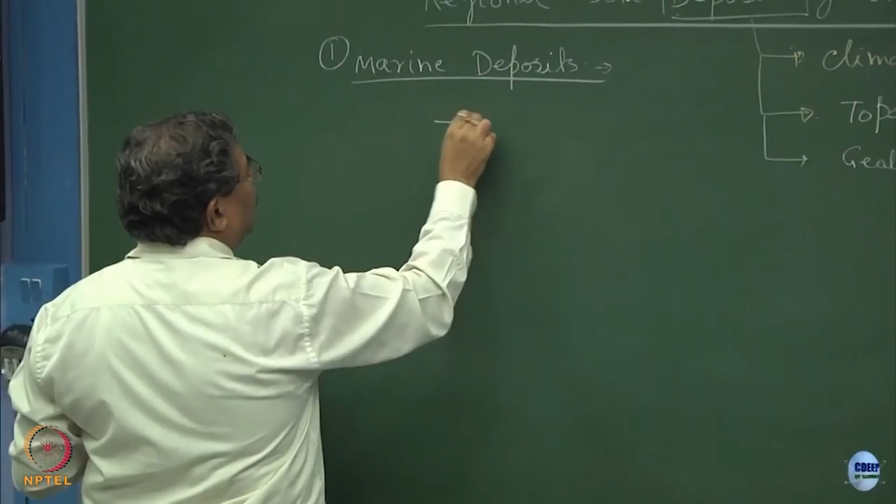First category is of marine deposits, very soft soils, very high moisture content. A substantial portion of this type of soil would be organic matter.

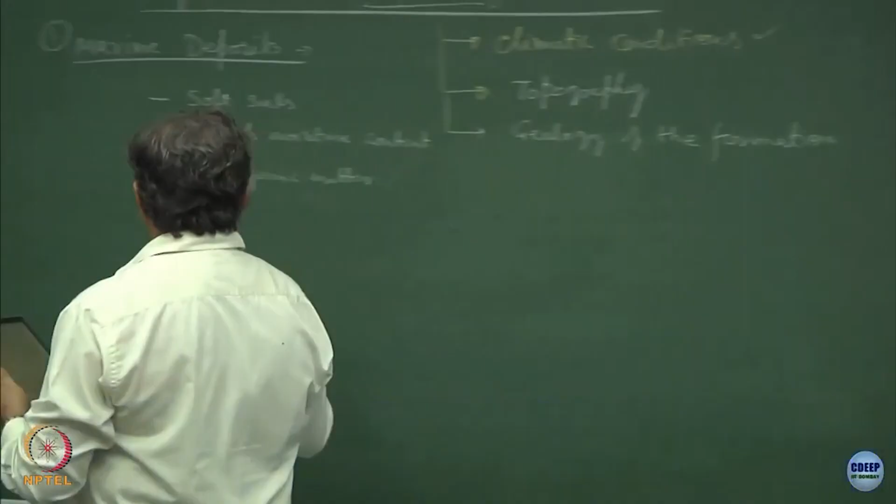Now, when the soils are soft and have high moisture content, by virtue of these two things they will become very compressible. Now, when they become compressible, what will happen? Is it a boon or is it a bane?

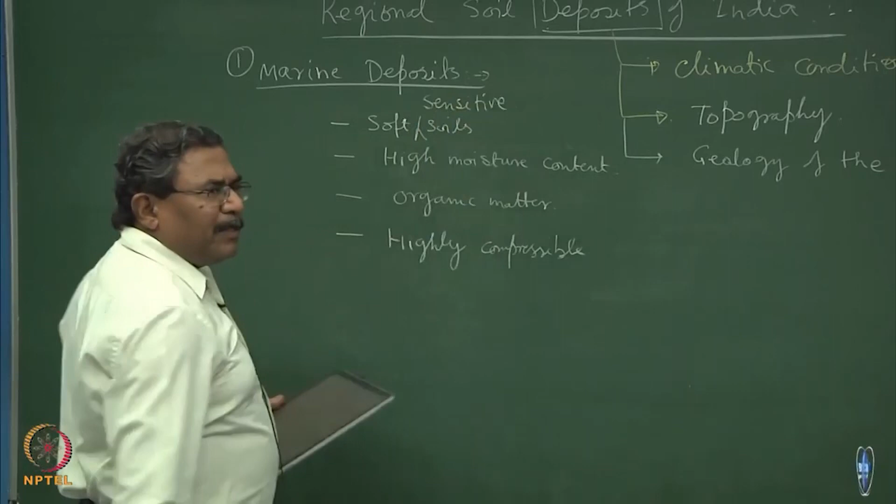Marine deposits, by virtue of their nature of being close to marine systems, have very soft, sensitive soils. When we say human beings are very sensitive, what is the meaning of this? You get influenced by everything very quickly. Somebody says he is not good, now you will be down for at least six hours. Like that only, these soils are very intelligent materials. They are very soft but very sensitive also. The moment you touch them they get disturbed.

It's very difficult to take out the sample from the ground, bring it to the laboratory, test it, and get the parameters which can be utilized for design purposes. So these are very soft, sensitive soils with high moisture content. Why? Because they are in the water body all the time.

Organic matter is present, it is a bane for geotechnical engineers, but a boon for which industry? I am yet to see any agriculture farm sitting on marine clays, only oil farms can be there. Hydrocarbons. So organic matter, which becomes a bane for me, is a boon for the guys who are into the petroleum industry.

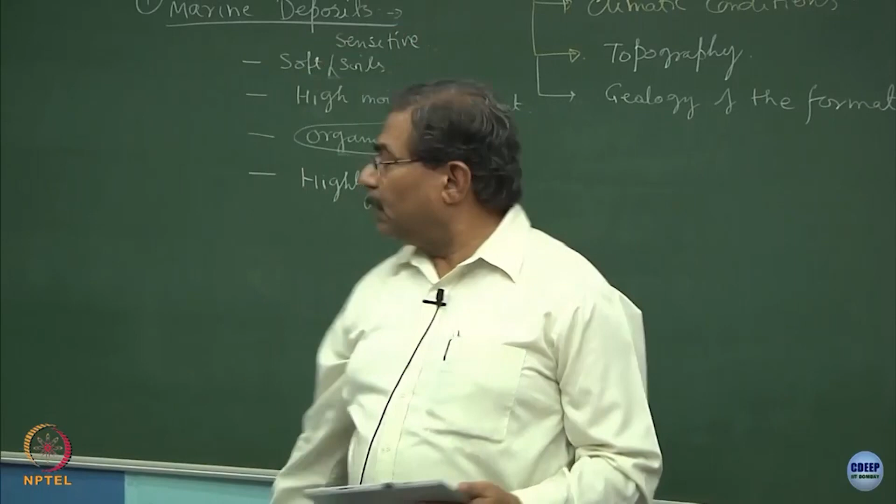Bombay High, there is only one Bombay High. Have you heard about anything else except for KG Basin now? In Assam you have some oil fields, in the western part of the country now you are talking about Aishwarya and all these Navaratnas which have come out very recently in the deserts. So wherever you have organic matter - by the way, calcium carbonate present in desert soils could also be organic in nature. It could be inorganic also, it could be organic also.

So this organic matter plays both ways. These deposits are known for good oil reservoirs - these are the petroleum reserves. But as far as laying the foundations, construction of infrastructure, creation of buildings is concerned, it's a very big problem. These are highly compressible, just like a sponge.

Another category, let us talk about the black cotton soils which somebody was discussing.

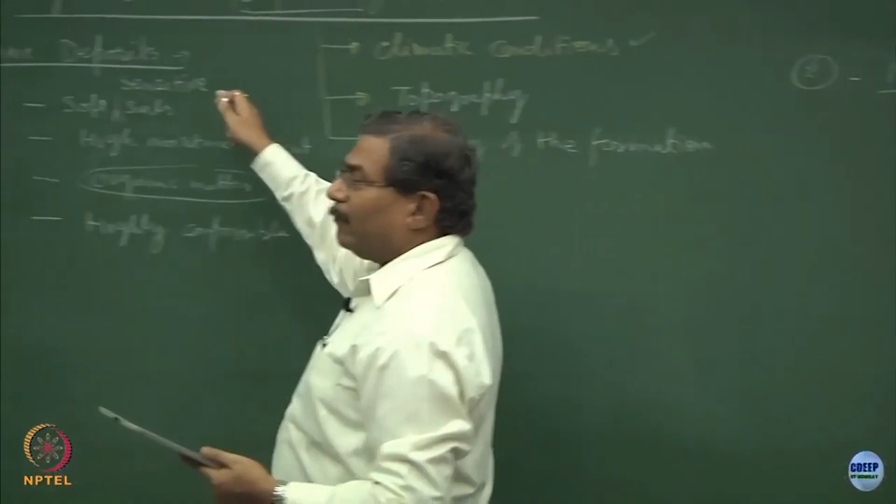But believe me, you are lucky that you are studying geomechanics in the coastal region. Sitting at the marine deposits, the saying is those who start their profession with marine deposits flourish much more. I hope you can understand why - because the challenges and the ways to learn the material and perfect it are much more as compared to any other part of the country.

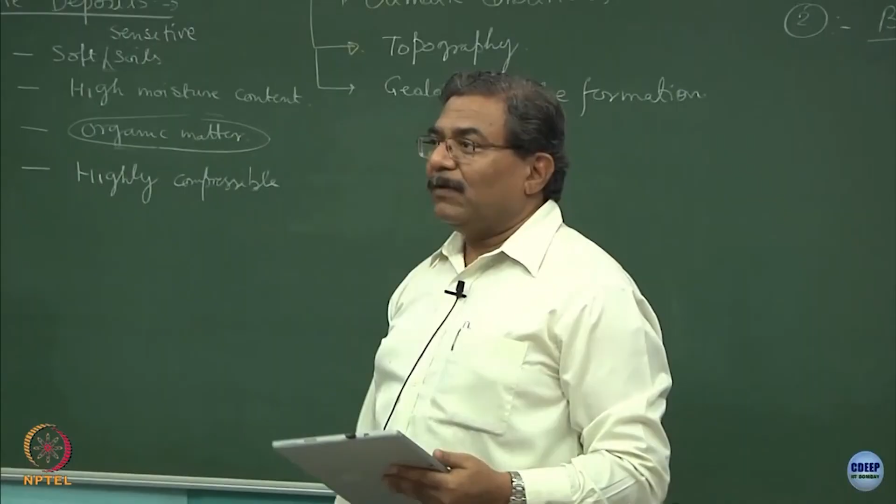So the guys who are sitting in the northern region or hardcore southern peninsula are unfortunate, they can't practice this much. When I say practicing, I hope you understand the meaning of the word practicing. What do lawyers do? They practice law. So this is the subject which is to be practiced.

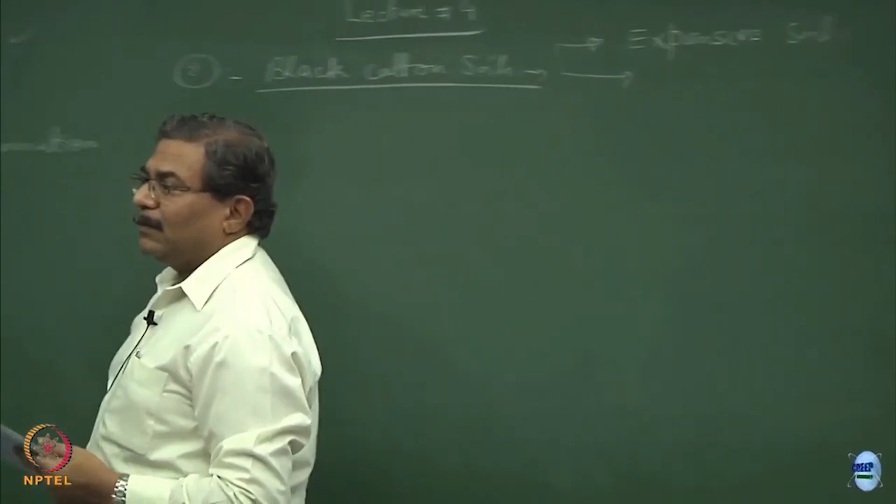So black cotton soil, by virtue of the minerals present in it, is an expansive soil. Mind the spelling of the word - it is not expensive. Most of the interviews where I sit, most of our graduates say it's expensive soil. It is not an expensive soil, it is an expansive soil. The meaning of the word expansive is...

Somebody is from Vidarbha - who is from Vidarbha? You, not really, but Indore - not Indore - say parts of Karnataka, Nagpur, yeah, but these are the deposits where you have black cotton soil. Nasik is a beautiful example.

So these are the places where you will have mostly black cotton soil, where you see cash crops being grown. So these soil deposits are very good as far as cash crops are concerned. What are the cash crops? Cotton.

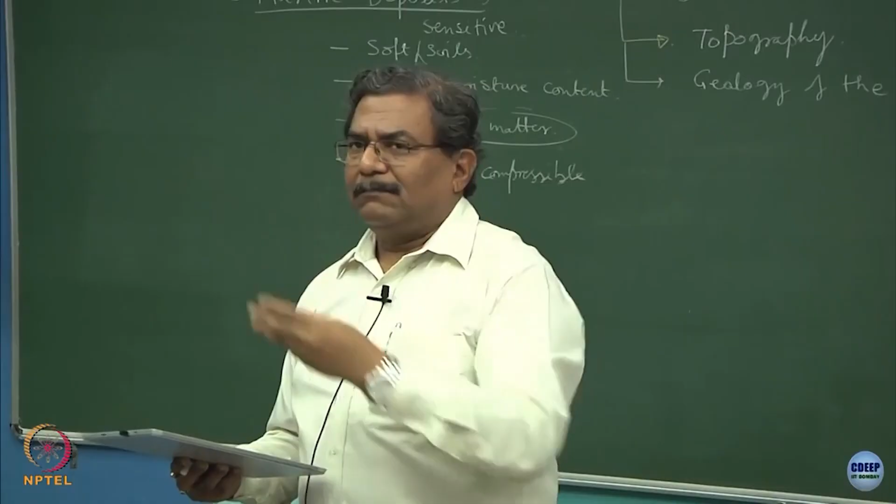Number two, yeah, you are right. Haldi - oh, I did not know that, okay, haldi. Third one, cash crop, yeah, main cash crop - sugar cane. Big sugar industries are there in the whole Maharashtra region.

So, because of the property of the black cotton soil, it retains a lot of moisture - not because of being organic and fibrous in nature. Who was talking about fiber? You were talking about the fiber. It's not being fibrous in nature, but by virtue of its minerals - and the minerals present in this material are known as montmorillonite.

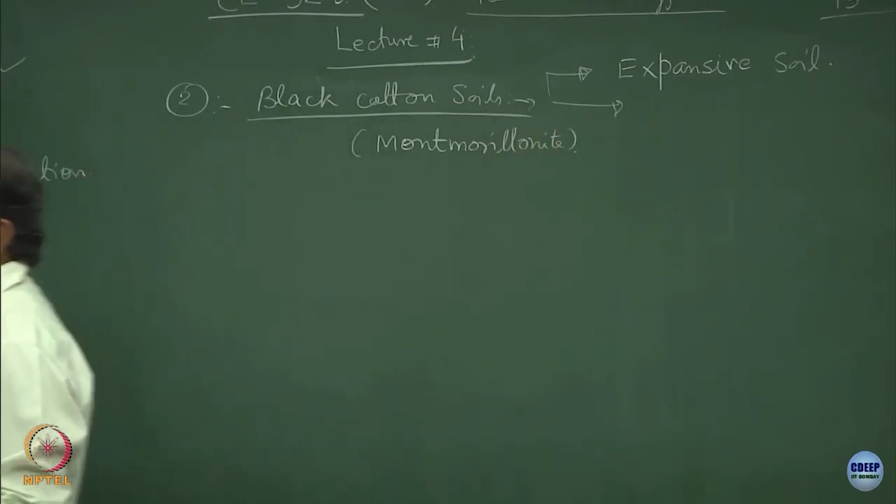Clear? This is a cousin brother of bentonite. Another cousin brother of these minerals is smectite. Where do you use smectite? In which industry? Sports. Clear? So, if you want to make pitches, you have to have smectite much more in proportion; it becomes a good recipe. So, black cotton soil will have mostly montmorillonite, which is a type of a bentonite,

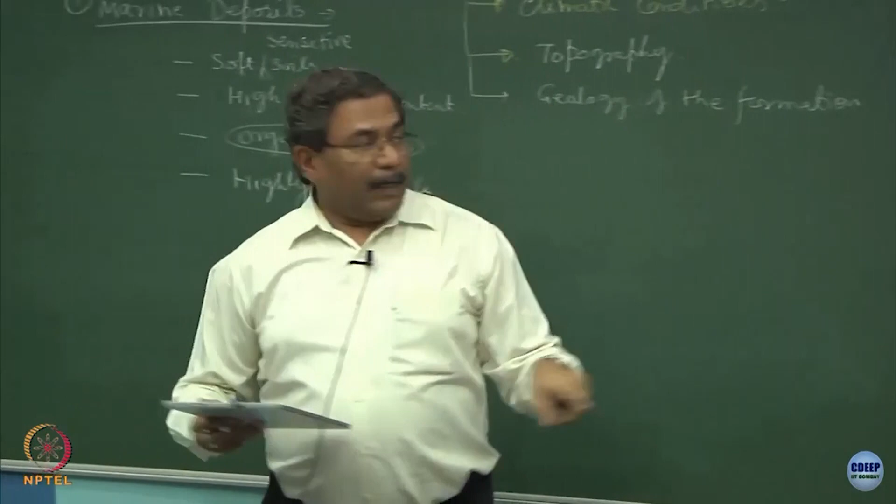but it is quite rich as far as the agricultural properties are concerned. Why? The soil's particles are very active chemically. Somebody was talking about it in the very first lecture: the sorption capacity of the particles is very high. Clear? So, the moment you add fertilizer, not even a fraction of fertilizer will go unutilized. Each particle of the fertilizer, or each drop of the fertilizer in the liquid form, will adhere to the particles because of their mineralogy. Clear?

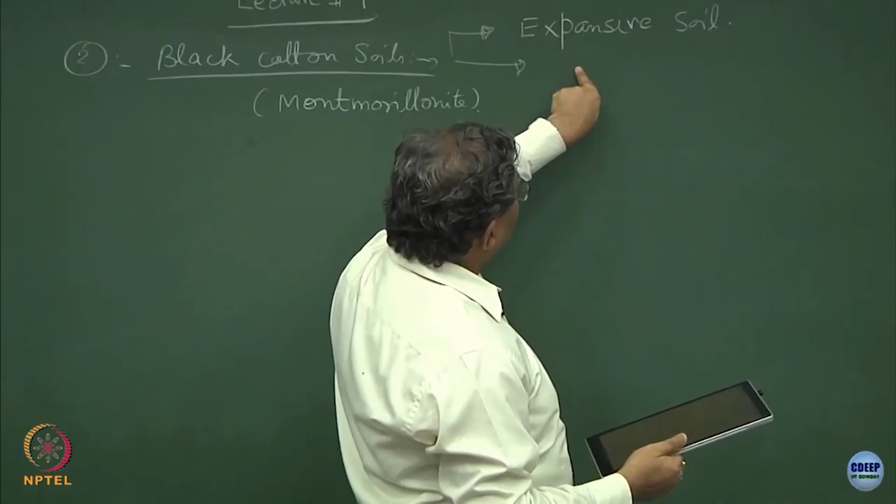And this also is a curse, a bane. Why? By virtue of all these things, they attract moisture a lot. So, the moment they come in contact with free water, if it is raining heavily and water gets logged, this mineral is water thirsty, hungry. What does it do? It can take as much moisture as possible. Clear? So, that is the problem, and when the dry spell comes, the dry season comes, this moisture gets lost.

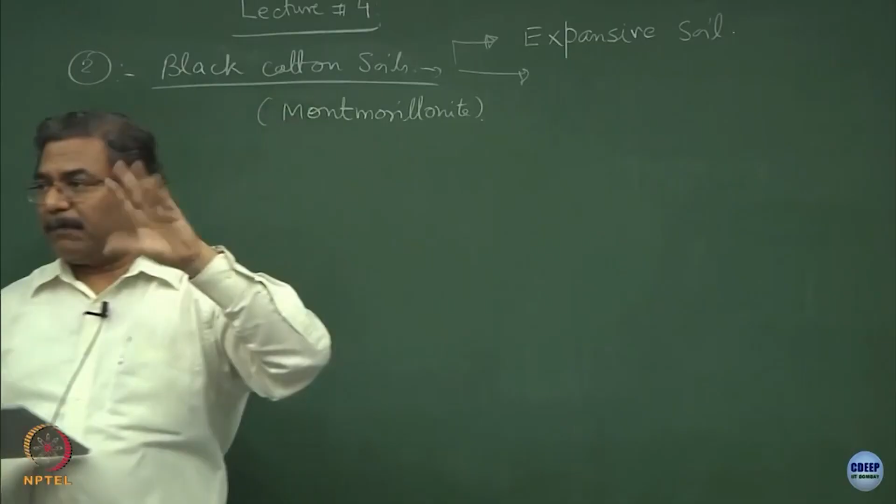So, it acts like a spring action, the soil shrinks. So, as far as the buildings are concerned, it is not a welcome material. In earlier days, the thumb rule was get rid of this material, excavate and replace the soil with better soil. Nowadays, the problem is the constructions have become so big, huge. How would you dig it? Where will you place it? How would you bring soils from another place? How will you compact it and so on? Lots of challenges are there.

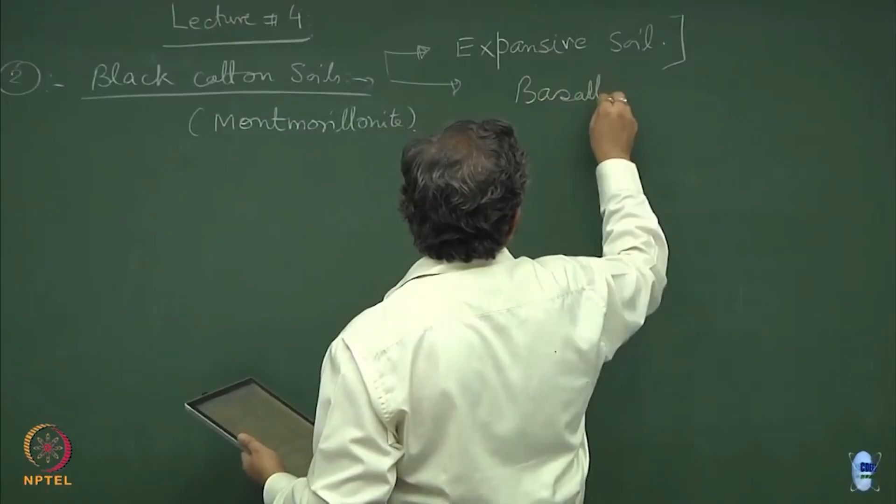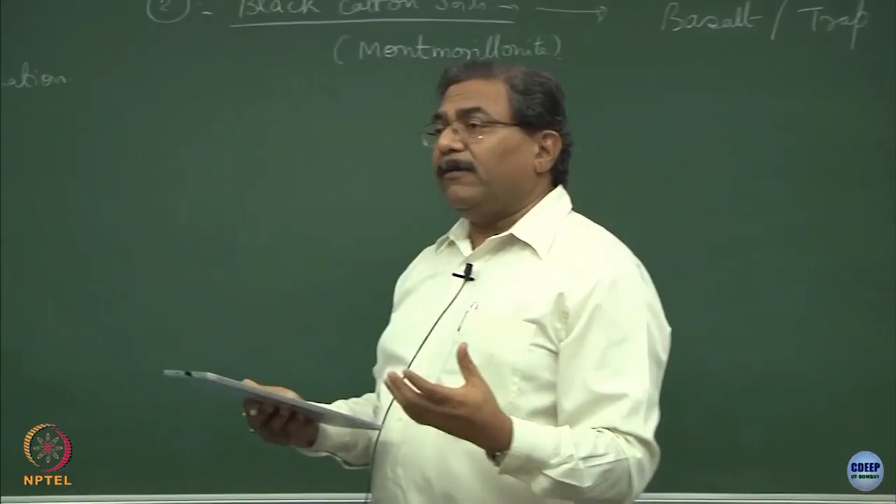Now, as far as the formation is concerned, these are formed mostly from basalt and trap. Trap is a type of rock, and that is why we call it the Deccan trap, Deccan Peninsula in India, and this is mostly basaltic in nature, alright. So, the type of rock which we have in the Bombay region is very dense, very hard basaltic material. So that is why it is very difficult to make infrastructure here; excavation is very difficult. So this process is known as swelling and shrinkage.

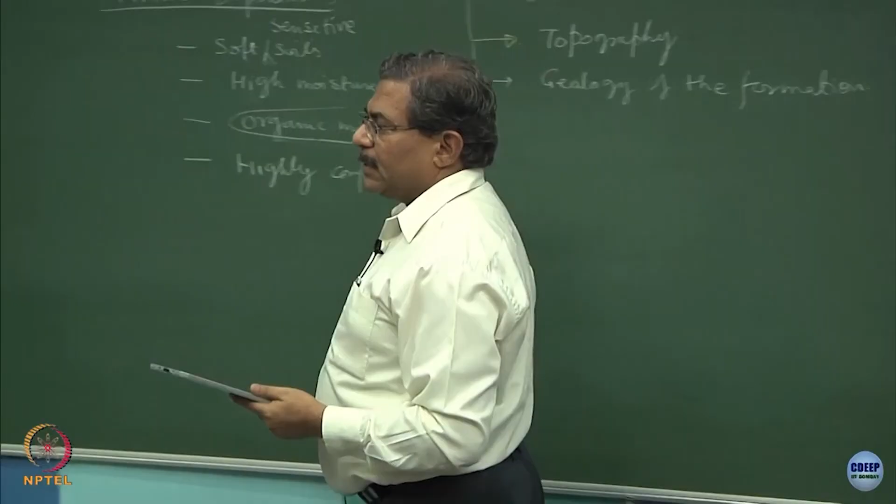This also hints at the property that this soil is very intelligent; it can sense the atmosphere very soon, is it not? So the moment the atmospheric conditions change, it starts behaving. Incidentally, in case you get a chance to work in the pharmaceutical industry, most of the geotechnical engineers govern the pharmaceutical industry, by the way. There was a time when I did a lot of consulting for Sandoz, and this is a very interesting process. Later on, I think I told you about my association with Reliance Life Sciences also, where we are talking about controlled porous media in the form of a controlled drug delivery system.

So I can play with the minerals, I can make them so porous like rasagullas, alright. So those who have diabetes, what do they do? They squeeze out all the sugar syrup, correct, and they just eat the porous part. People like us who are fat, they have consumed a lot of sugar and the bellies are out, clear. So this is the difference.

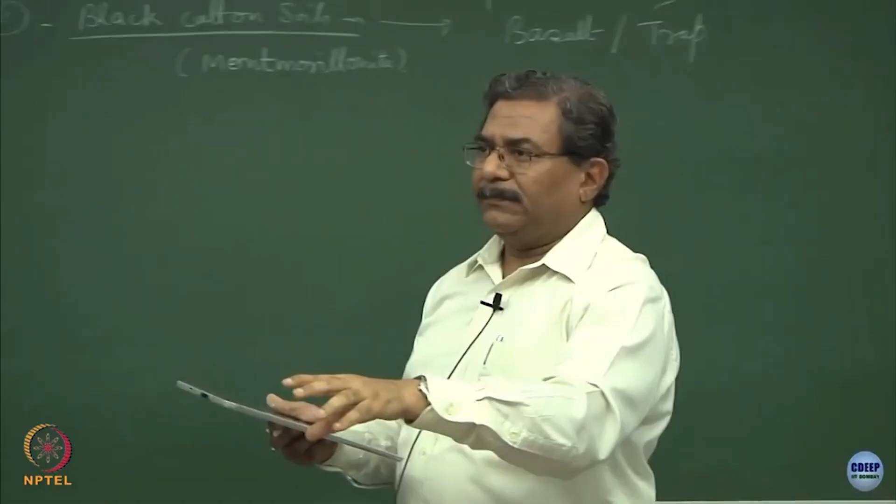So I can create a porous media where I can keep anything inside. I can keep a fertilizer, I can keep, let us say, chemicals, I can keep bacteria, whatever. So this is how you can play with the minerals. You can fill them with something, you can squeeze out, you can allow them to shrink and so on, and you can use them.

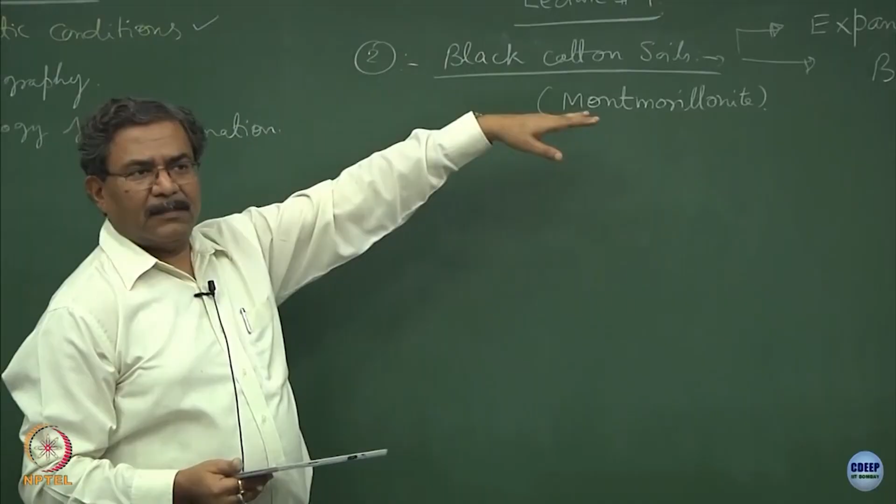Is there anything else which I thought of telling about the black cotton soil? No. So these are the good crop yielding soils. Most of the farmers in Nasik and Satara and all these areas, they grow a lot of sugar cane, then cotton, cashew nuts; these 3 are cash crops. 4th is now pomegranate. You were talking about haldi, I am not sure. And what else did somebody say? No, pomegranate is a big business in Maharashtra. Alright.

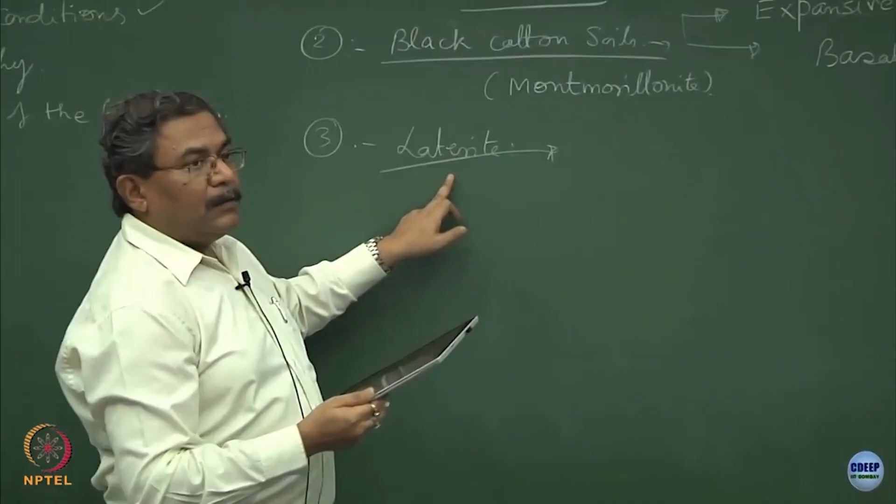Another one is laterite. How many of you are from Kerala here? So maybe the northern part and the middle portion of Kerala bordering Karnataka, I think you would have laterite. Incidentally, when the Konkan railway was being done, 1995-96, the big challenge was how to cut these types of lateritic rocks, and that was my first or second project. I was associated with the Konkan railways. Very hard rocks, but perforated. They would be having vesicles, and that is because of the leaching.

So is anybody here from Mangalore? Wow. Which part of Mangalore are you from? Near the airport area or maybe towards the refinery? What is the name of the place?

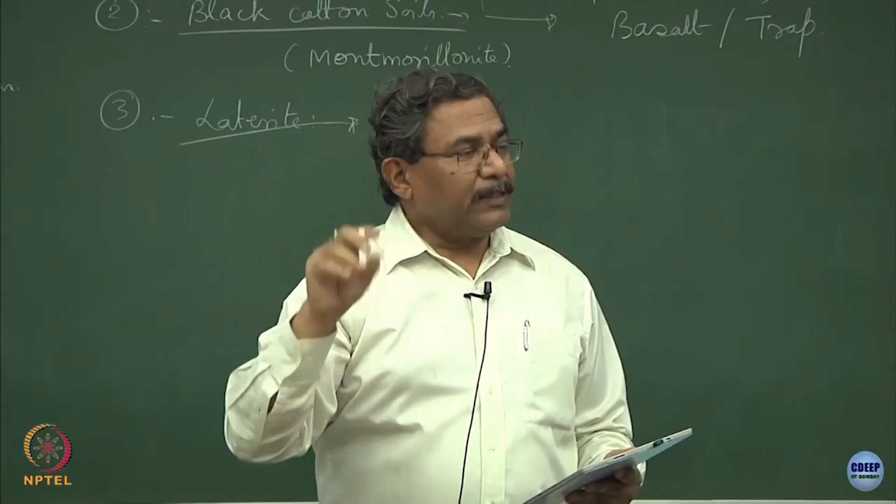Kodikal. So somewhere close to NIT Surathkal? Yeah, so that is mostly lateritic belt, alright. Red color soil, you will be having impregnation of yellow and white inclusions. These are magnesium oxide, iron oxide and so on. The big problem is, like human body, all these minerals keep on leaching out.

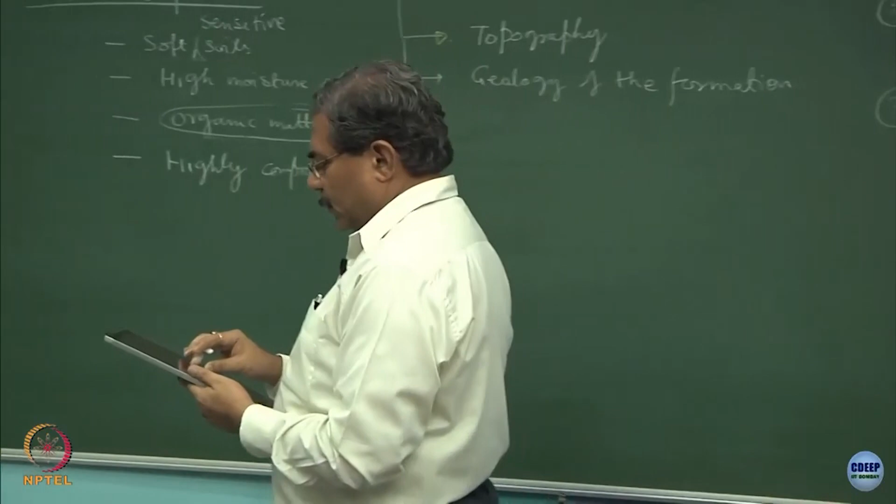In local language they call them as shady soils. Have you heard about this? SHEDI, shady soils. So a lot of people have done research on this. So all these salts keep on leaching out because of excess rains and the system becomes vulnerable, clear. So these are formed by decomposition of the rocks.

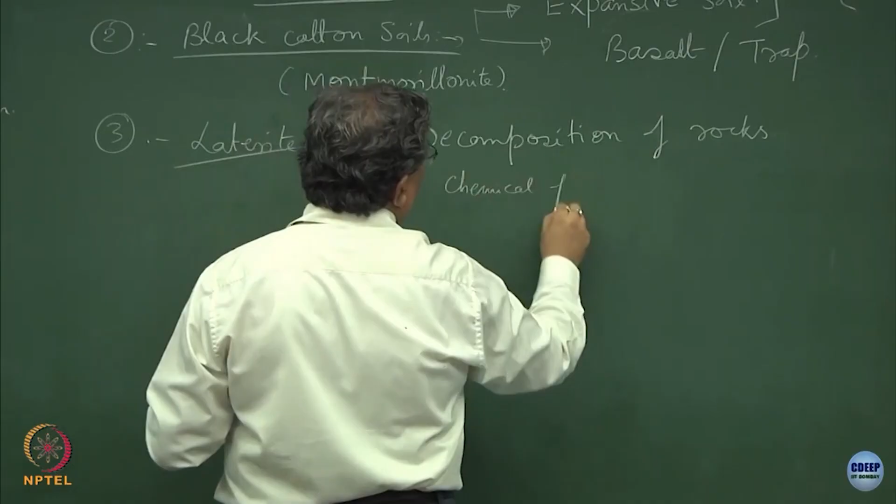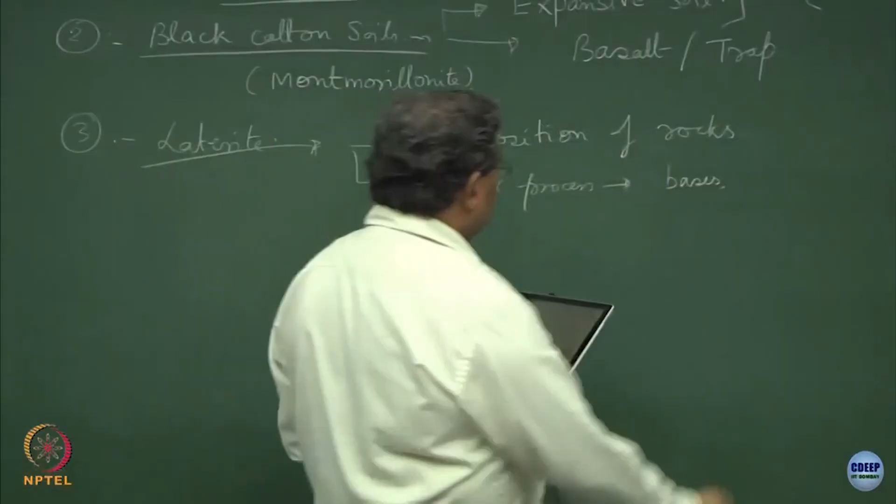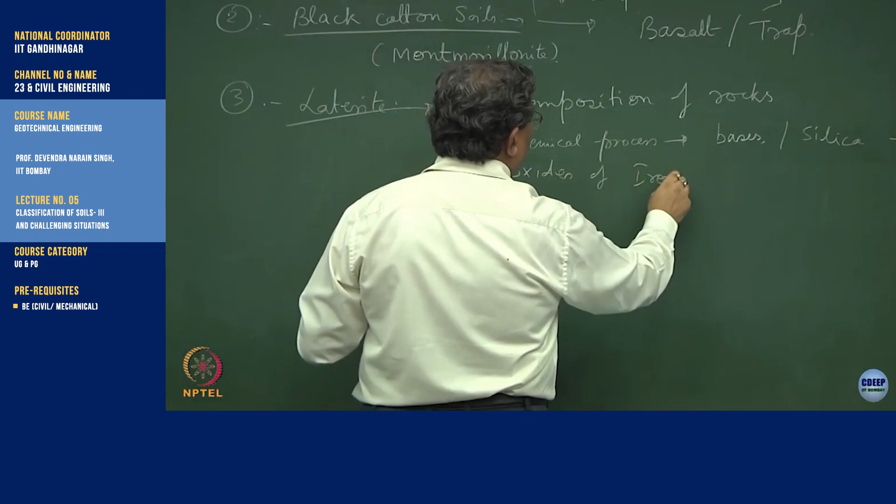It is an interesting chemical process which goes on. By this what happens is that bases which are present in the system, all sorts of bases, hydroxides and silica, are getting removed. And these are mostly oxides of iron and aluminum. In layman's language we call them as red soil. In part of northeast also you will be getting the lateritic material. So these are the lateritic formations.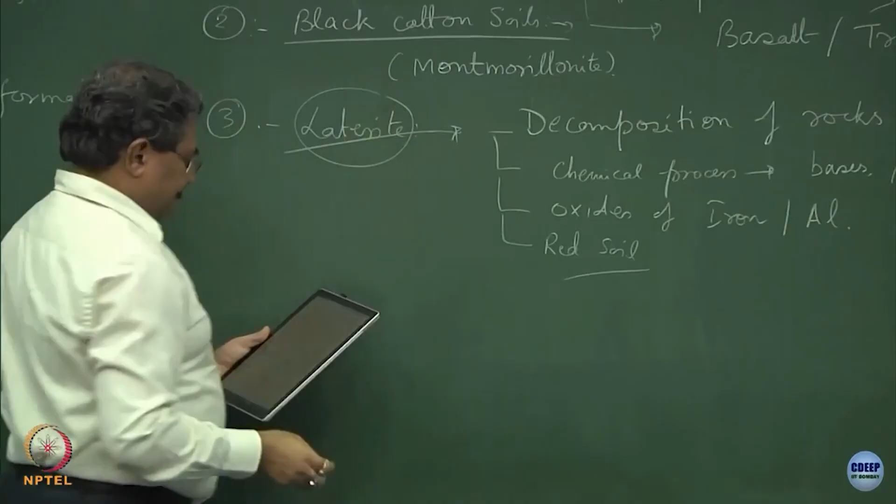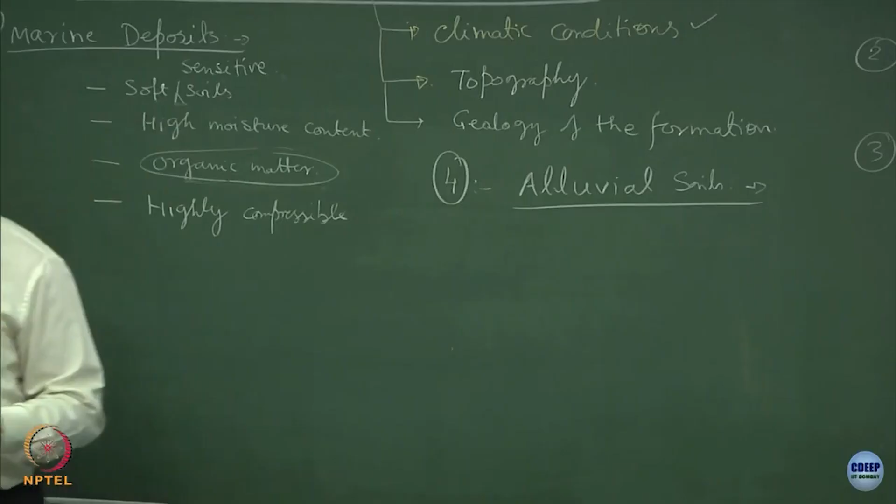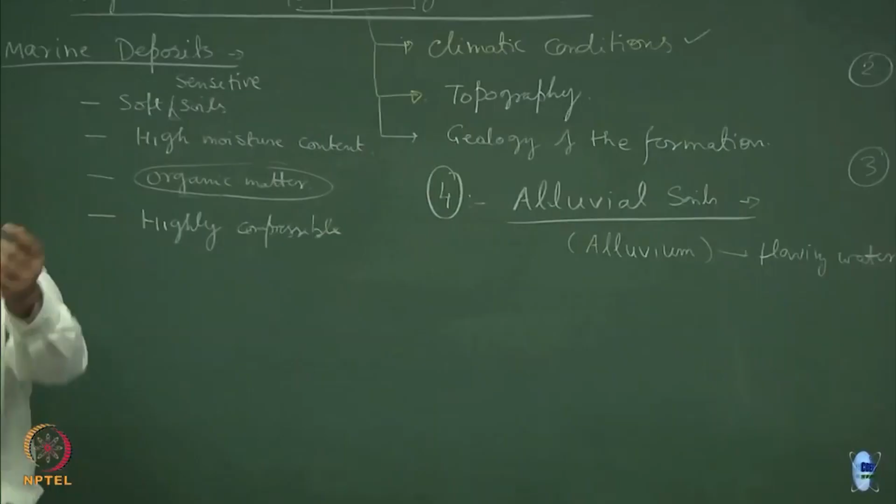Then comes the alluvium or alluvial soils. A typical alluvium is river borne sediments getting deposited somewhere. Now this is what is known as alluvium, alright, a deposit of sand, mud etc. formed by flowing water. So these are the layers of sand, silts, clays, and this is a typical alluvium.

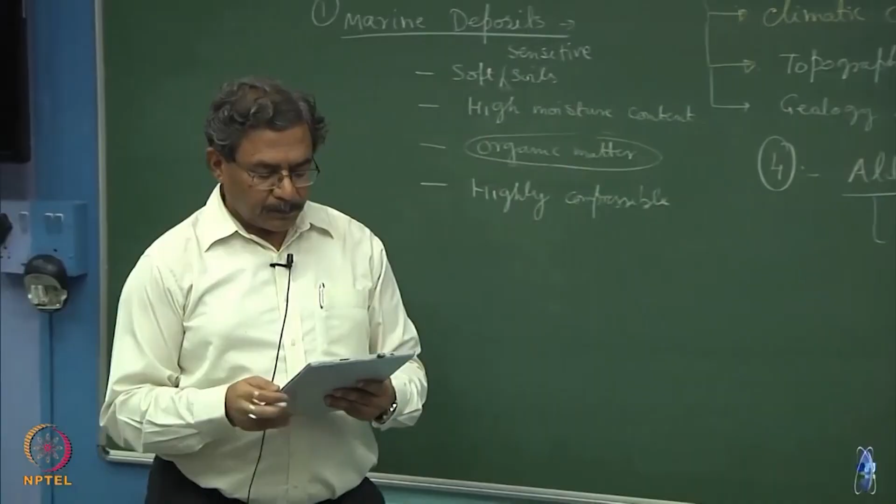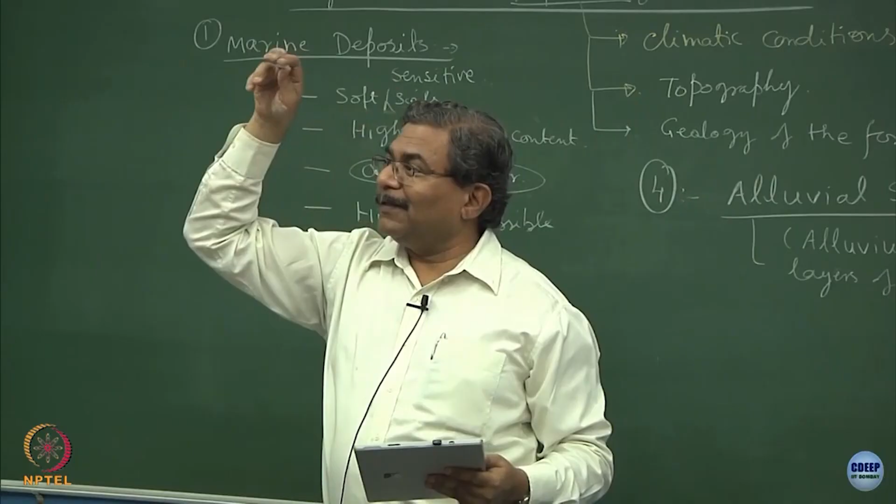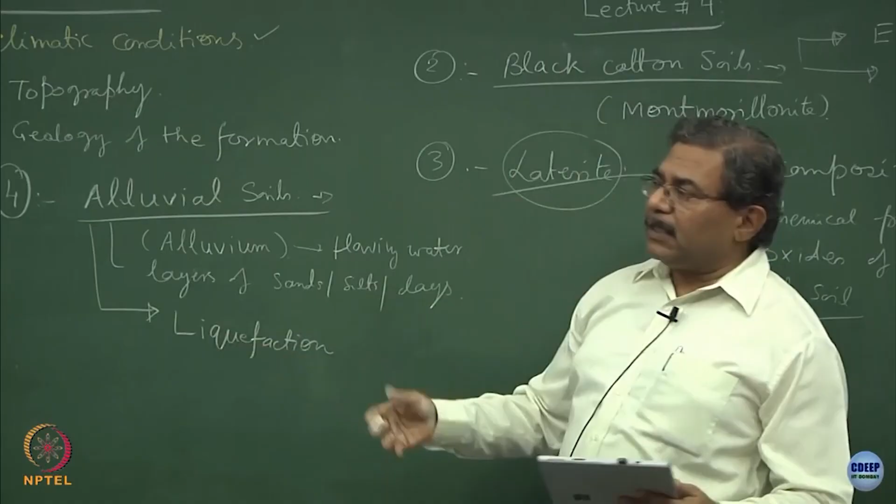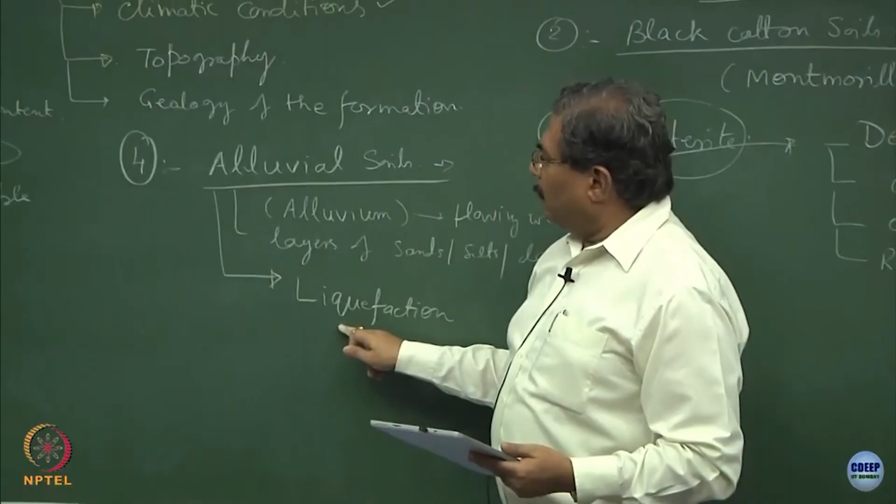These type of soils are, who was from Gorakhpur? Yes, these are prone to liquefaction. Is this okay? Can you read this? So if earthquake comes, it strikes this strata, the soil mass starts behaving like liquid. LIQUE, liquefaction. It just behaves like a liquid, and we will study this state of the material, how it gets induced because of the earthquake triggering. So the more motions which occur in the ground, in the form of the shear waves, liquefaction might occur. Fine silty sandy material is very prone to liquefaction.

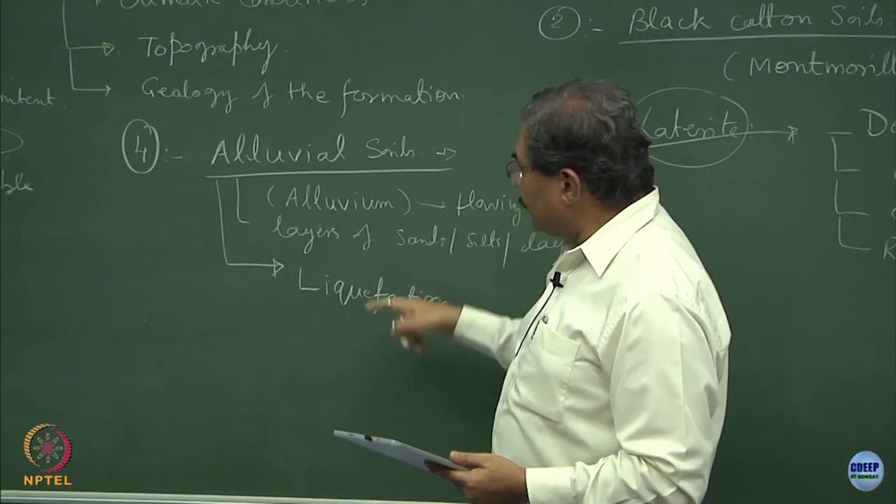I am sure you must be aware that lot of money is now invested in the eastern part of Bihar, and lot of big factories are coming over there now, particularly DLW is spending a lot of money, Siemens is doing a lot of work there, a lot of land reclamation is being done there and so on. This is a villain. If you can take care of this, you can do very good infrastructure. We will discuss why liquefaction takes place. Now liquefaction is loss of strength of the soil mass due to earthquake.

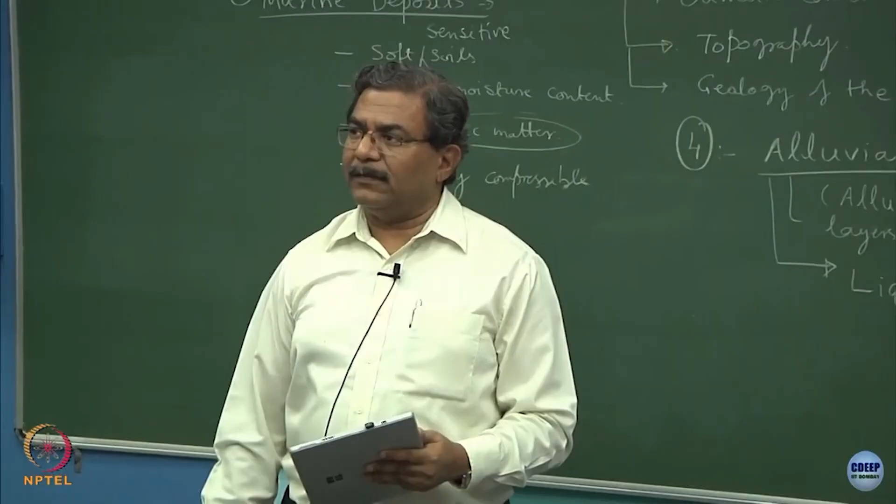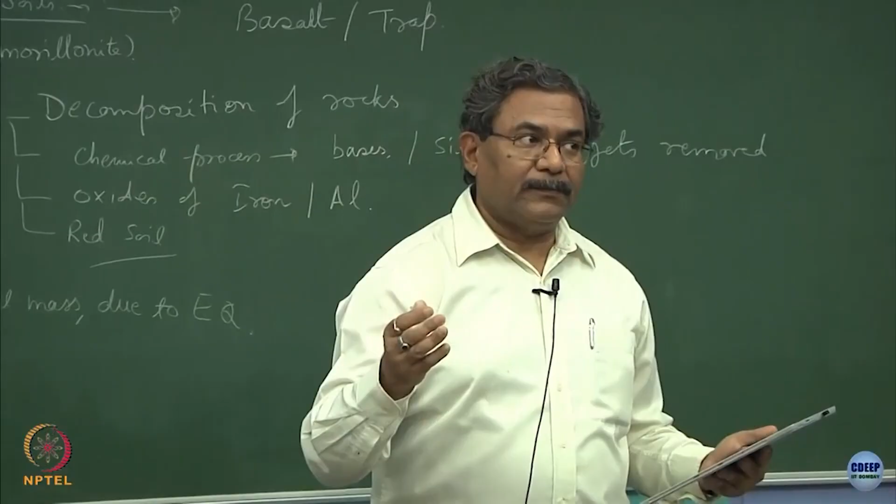Earthquake is a natural phenomena, it could be man made also. Yes or no? How? Koyna Dam is a good example of man made tremors, is it not? Tehri is a beautiful example of man made tremors. I might be laying a foundation of a moving, let us say vehicle or a forging unit where the hammer gets dropped from a height. Under all those circumstances there is an impact, and impact is causing the loss of strength of the soil because of any vibration, movement, shear waves travelling through the system. Is this okay?

Another category is desert soil. We have discussed a lot about it, and I hope you understand the issues. It is very difficult to stabilize these type of soils, either these are aeolian or loess, which we have discussed today. I am sure those of you who are from Rajasthan area must have realized that after independence it took several tens of years to create a railway line over there.

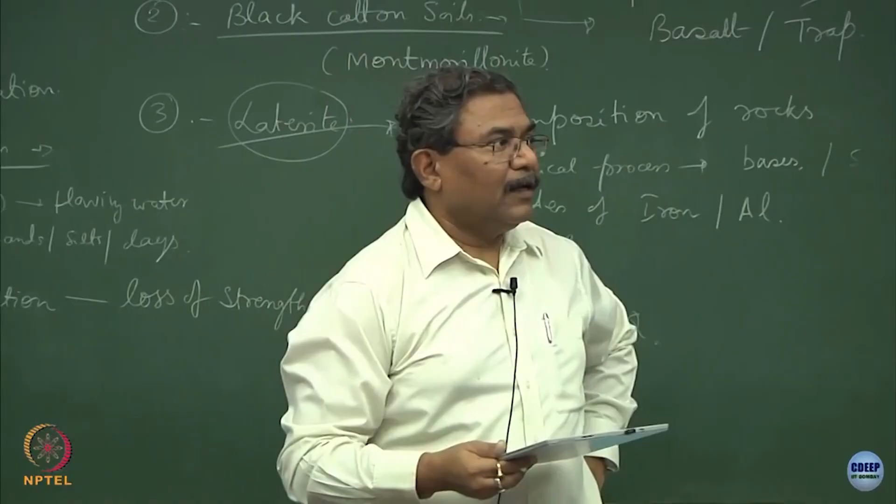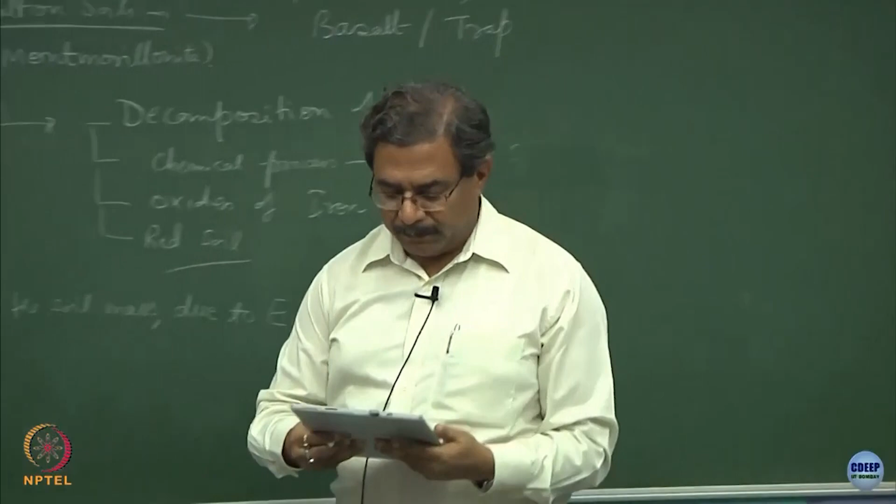So, we have discussed this. Now, I was talking about the infrastructure over there. The biggest problem is, as I gave an example about the Indo-Pak border, you cannot create even railway tracks. What happens? The soil gets eroded, is it not, because of the wind. So, desert soils, the biggest problem is how to stabilize them. Indian Army is doing a lot of good work there.

Incidentally, if deserts are not there, where would we have tested our nuclear weapons? Imagine. So, this is a boon. You agree? Where was Pokhran done? Very close to Jaisalmer, 30-40 kilometers away from Jaisalmer. So, if you are going towards Jaisalmer, you will be passing by the area which is cordoned off completely by the Indian Army. They do not let you go over there.

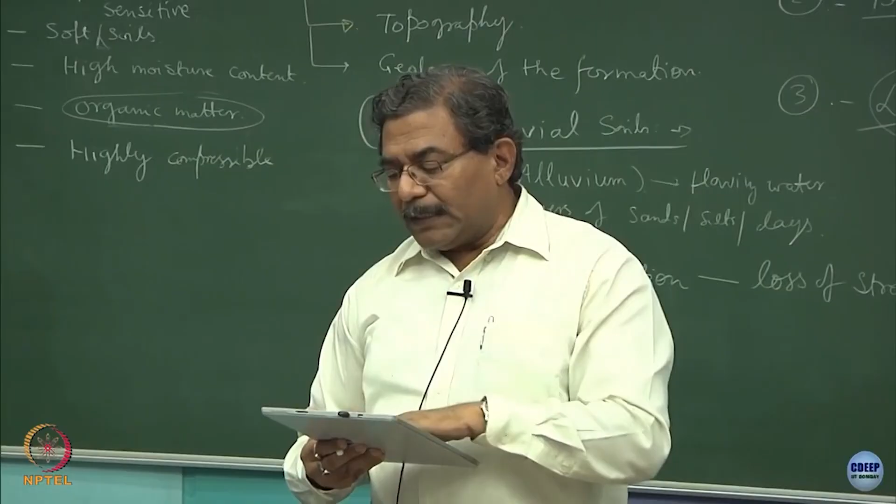So, if you get a chance to work with atomic energy, AERB or BARC or these types of organizations, you will realize how this detonation of the weapons is done in sands and why. So, you might get an answer to this question as the subject grows slowly, fine. There must be some mechanisms.

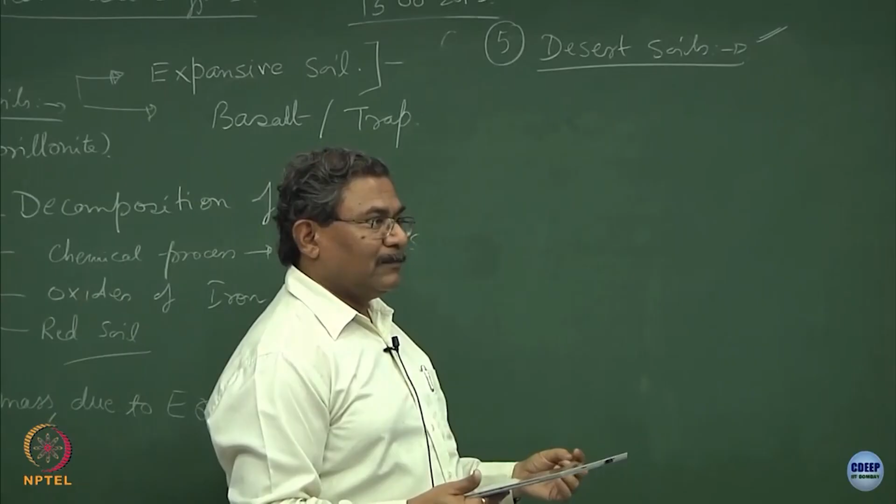So, I was talking about the shocks, earthquake, then I was talking about the shear waves, then about how the migration of the shear waves occurs, and then if I have to test the weapons which are nuclear, these are the right places, or the sea. Where would you like to do it out of the two places? Testing of nuclear weapons, if not a given country. Alright.

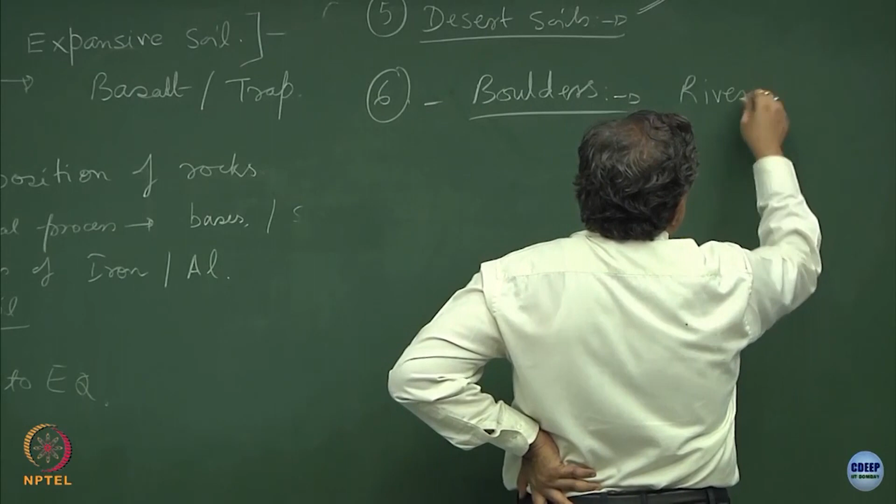Then come the boulders. I think we discussed this when we were talking about colluvium deposits, if you remember. So, on the steep slopes many times the boulders, clay matrix, fall down, get deposited, and then it becomes very difficult to create infrastructure over there. These are the typical deposits of the country. Mostly the boulders are because of the rivers which are flowing through hilly terrains.

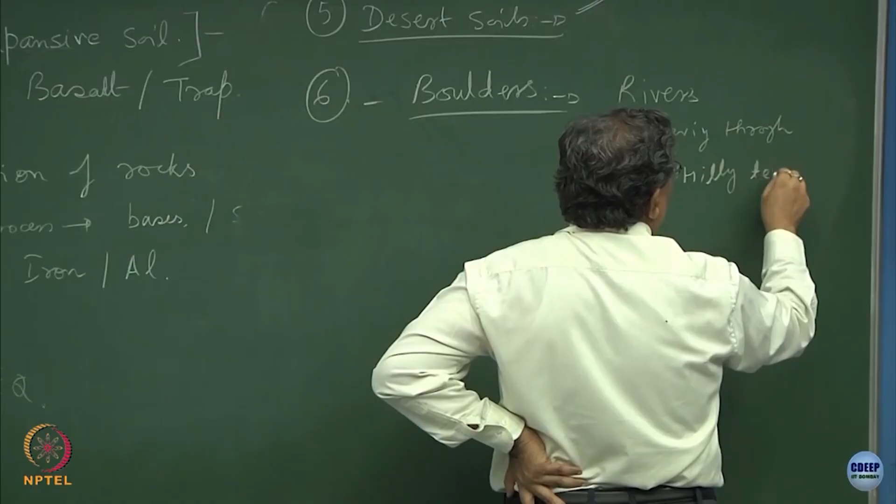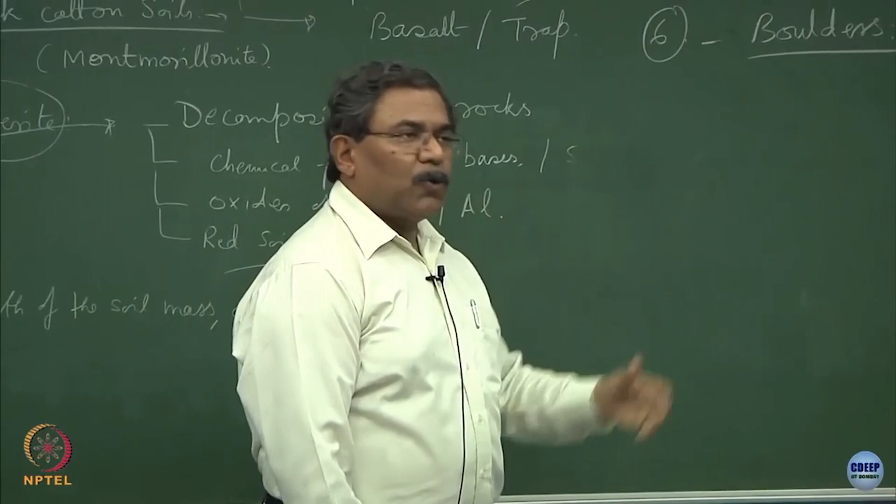Try to come out with the challenges associated with these deposits as far as engineering and infrastructure development is concerned. Though I have been telling you all sorts of problems, it is a good idea to go through this in literature form and read it, and in case you feel that you want to give back to the society from where you have come after a few years, this is going to be a very good homework. This homework is not time bound, this is for your entire life.

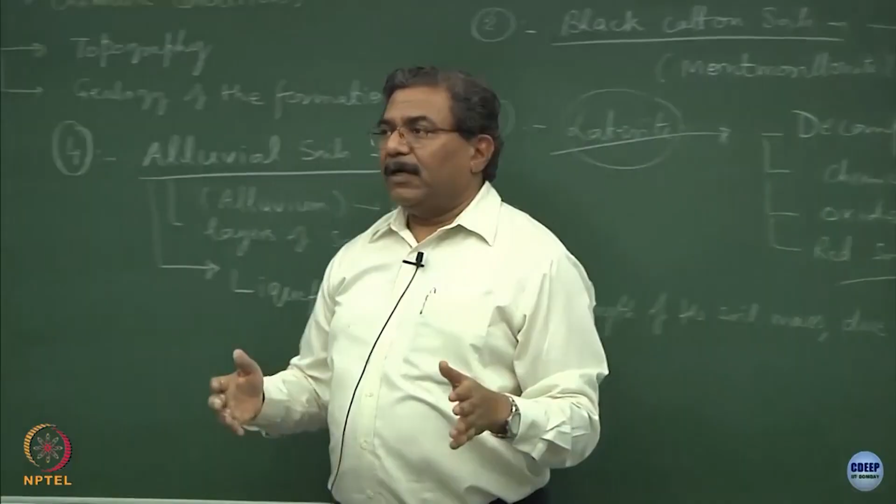Know your region properly, try to solve the problems of the region, and for that you have to study all this. So, how to do engineering, how to do technology demonstration in most of these deposits which are so difficult to manage, where people are unable to give a solution. This is what you should learn.

So, let me take you through some of the most challenging tasks which geotechnical engineers face in their career, and people describe them as problematic soils. And let me tell you one thing, this is the old concept. When I was a student, this is how we were introduced to the topic problematic soil, but in due course of time I realized that there is nothing known as problematic soils. These are challenging situations, and if there were no challenging situations, the profession would not have been so prosperous. You understand? So, this is where I write that because of the problematic soils, our profession flourishes.

I do not know whether you know or not, I am the consultant to Navi Mumbai International Airport. The whole project was my brainchild, and I convinced the government that this is how it should be done in the least time and with the least money. Ideas just come when you teach in the classroom and somebody asks you a question. Reclamation is one of the examples of how this Navi Mumbai International Airport has been done.

So, before I stepped onto the ground, the site was problematic because it was a part of the creek and active sea. It is the Panvel creek, I do not know whether you are aware or not. A creek is a place where most of the time water remains stagnant. It might be flowing also. So, Panvel creek, if you see on Google Maps, adjacent to that is the 1300 acres, which is 3 times the IIT Bombay campus, and this is what your new airport is going to be. Just for instance, I am giving this example.

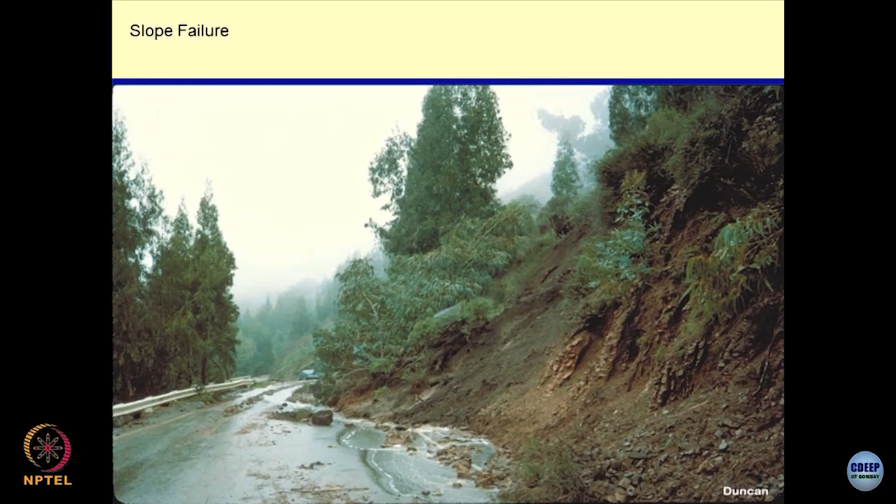It is another interesting problem: pipelines are the arteries and veins of the country. Why? Like your body, what do veins and arteries do? They flow blood. These are the pipelines which are flowing water. You must have seen water comes to Bombay city from Nasik when you drive through the Nasik highway. We are not water sufficient, by the way. We get water from different dams in Nasik. They were done by the Britishers. Or oil, crude oil, again the economy.

Now, if these pipelines are located in regions like this, where the ground is not stable, what is going to happen? It will result in losses. Rather than conveying the fluid, there is a lot of spillage, the pipelines get distorted, they might get broken and so on. The cause over here is, if you look at this, the foundation has got completely washed out. So, next time when you are travelling from Thane towards Nasik, remain awake and keep looking on the left hand side at the entire pipeline system and see what type of foundation they have provided.

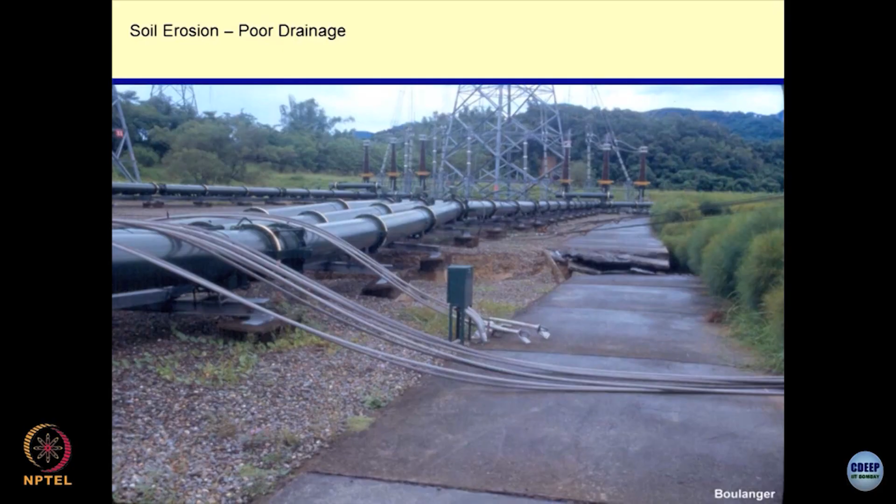One of the interesting cases which I am dealing with right now is for an MNC where the tolerance limit of the turbines, I think I gave you an example, is half a mm. So, when you design turbines, the tolerance is 0.5 mm. Now, ultimately the turbines are going to sit on a foundation which is located on the ground. Imagine if this type of situation happens, what will happen to the turbines, how would you run them?

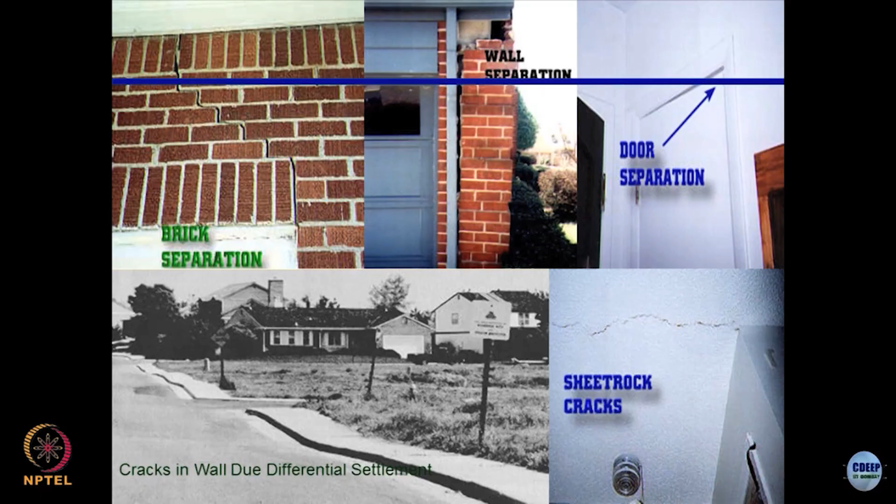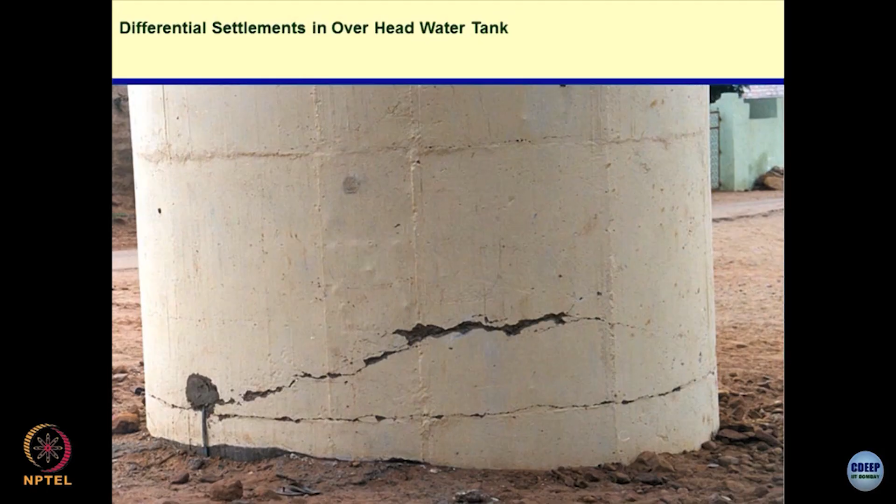I will show you some other pictures also, sorry, this is the one, look at this, the overhead water tank is differentially settling. If you have a very close view on this, you will see that the whole tank is settling on one side and it is cracking from the base, again because of the poor soil conditions.

Silos, I do not know how many of you are aware of silos. Silos are the places where you store grains, fertilizers, granular material. There is no difference between sands and wheat and rice and sugar, they are all granular materials for me. So, the way I would like to store rice or fertilizers, I would like to store sugar there also. These silos are huge structures, they could be for the army also. I might be storing their missiles. I do not know whether you are aware, a place very close to Bombay has these types of silos of strategic importance. So, there they are storing something different.

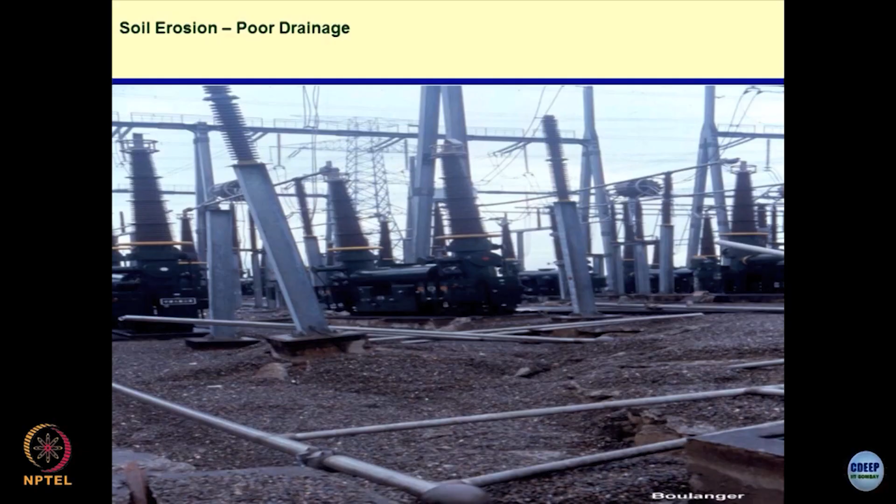Now, look at this, soil erosion is occurring and these are the transmission, what do you call them, powerhouses. This is where the foundations of most of the power structures are located, but because of the soil erosion all the structures are in a dilapidated condition. How would you deal with this type of situation? It is a strategic situation. All these things are related to each other.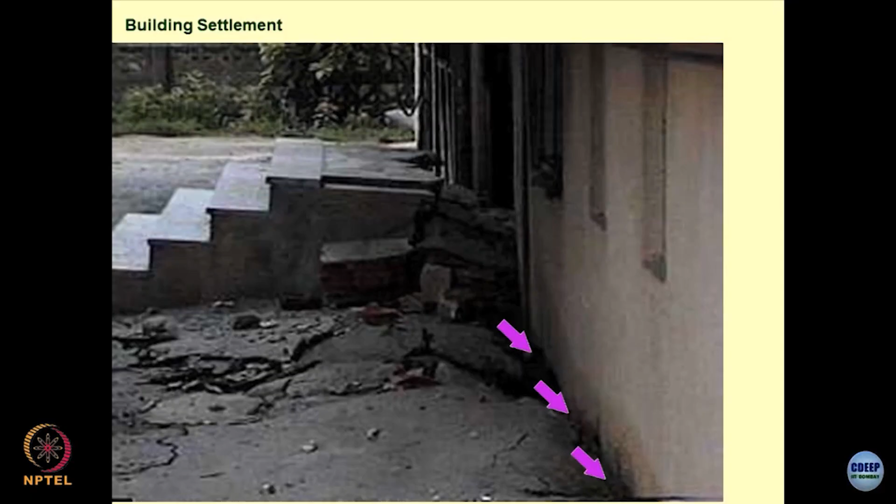This is another good example of how buildings settle. As I was discussing earlier, the staircase has completely got detached from the building, the plinth has cracked, the building is sinking, and it is a matter of few days before this is in the national news. This is a beautiful example - the staircases are still hanging in air where they are supposed to be. The entire building has settled down, but very uniformly, by the grace of God. Had it been sequential, I will show you what happens then.

We are going to do all this analysis, study these things, how to find out how much settlement has occurred, whether the building is safe or not, and so on. There is a beautiful example on the other side of the building I showed you - the whole building is settling down and cracking is taking place all along the building from the plinth and so on.

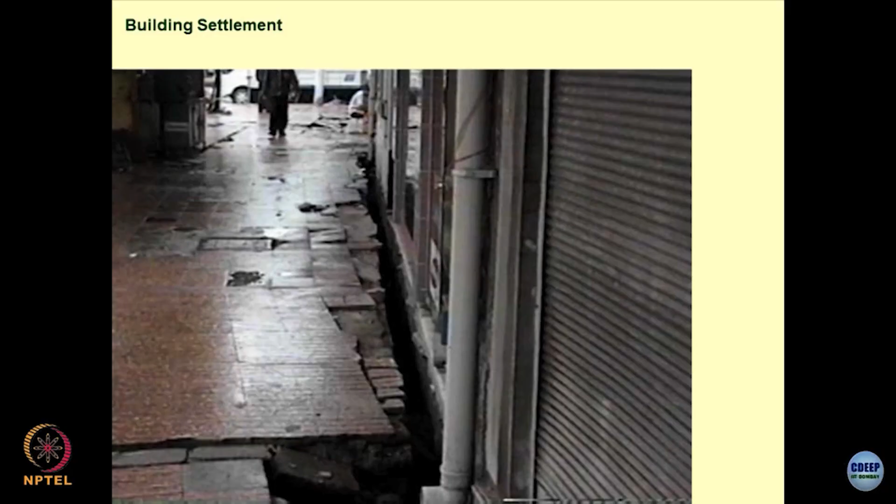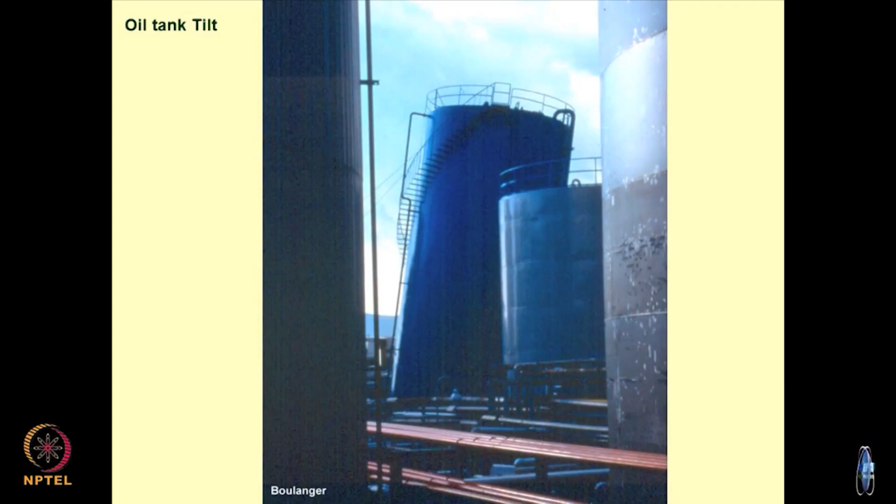So this is modern day civilization, and one thing is sure - people have ignored soils completely. They thought whatever is sitting beneath is not going to be problematic ever, but it is not so. All these structures remind you of the importance of studying the issues related with soils, rocks, and the subsurface.

This is a close look at the problem when this type of situation occurs in tank farms. All the piping arrangements which have been done are defunct, they have cracked. Why? Because you have designed these pipelines to be connected to a certain portion of the tank. Now, when the tank settles, these pipelines have got sheared off, veered off, or cracked completely.

How many of you have come across this type of situation? This is known as soil subsidence collapse - we also call it caving in, and sinkholes. You must have come across sinkholes. This happened at Sakinaka about 5-6 years back. This is the story of 3rd August 2019 - the Gurgaon traffic sewer line running underneath the road, and water from the rain might have weakened the road, causing it to cave in. It is happening very frequently. Read about this process, why it is happening.

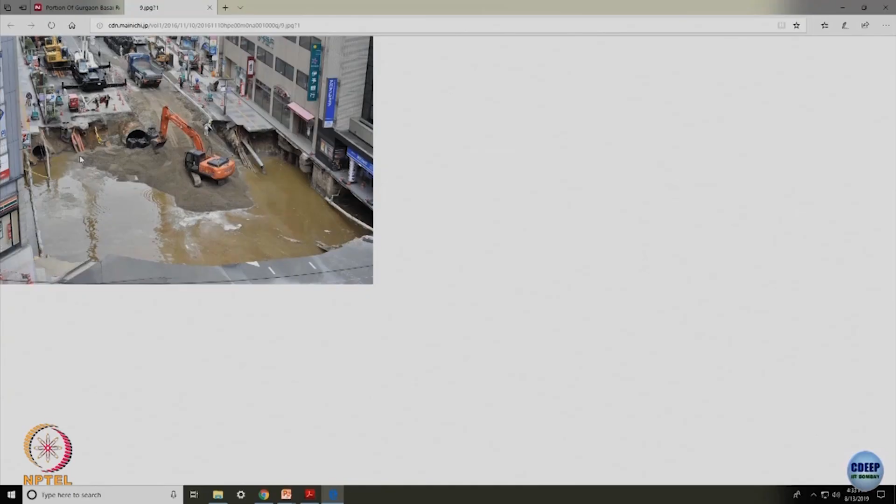Why? We will try to answer this. Look at this, a complete website is devoted to sinkholes. I hope you can realize what is happening over here, it is so dangerous.

Now, what is written over here is that sinkholes also form due to human activity, such as collapsed abandoned mines. You are getting this point. So the more and more mining operations that are occurring, while trying to sustain present day society, this is what is going to happen. This is a beautiful thing to see. Look at this, at the middle of the road there is a huge crater getting formed, and because of what?

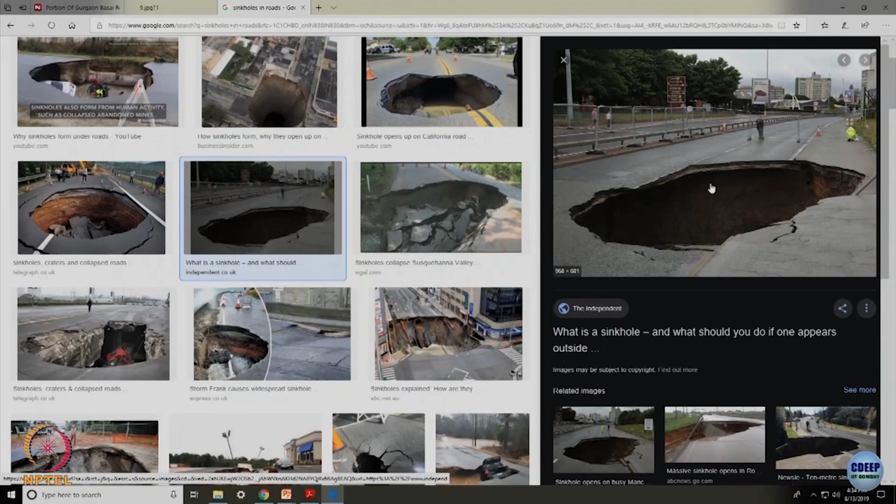I have dealt with a few similar situations in Bombay city also. There is another interesting situation, this one again from Tokyo. So if you have to analyze these situations, you have to study the mechanics of the material being used for creating these systems.

Typical landslides, the Bombay-Pune highway is famous for this. Go to the northeast, every day it occurs, and maybe in the upper reaches of J&K the big problem is landslides, roads getting blocked and closed and so on. How would you stabilize them? How would you create these type of roads for our countrymen and so on, this is a big question.

It's a beautiful scene. I do not think you have ever seen this. Have you ever gone towards the upper reaches of Srinagar? I do not know whether you can realize this or not, these are big boulders right next to the highway, and imagine, it is only a matter of time before this boulder is going to fall down.

A very good example is Badrinath and Kedarnath. When you travel from Dehradun towards these sides, every now and then big boulders fall on the cars and moving vehicles, and so many people die, they do not even report it.

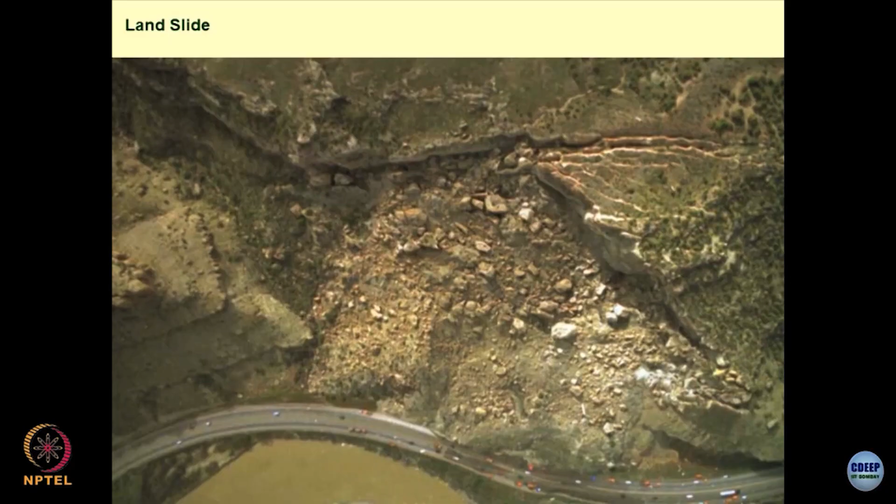Chardham Yatra, these are the transmission towers. I think there are several cases in India where transmission towers get uprooted, and these transmission towers are the ones carrying electricity from hydroelectric dams or units.

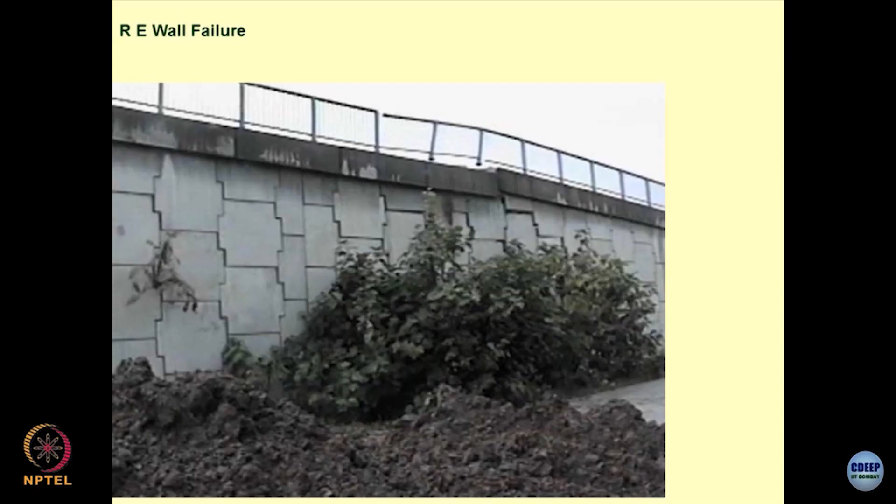How would you handle this type of situation? The RE wall failures, you must be reading about these in newspapers. There was a video also recently of an RE wall failing somewhere. This is a good example to see how the RE, or reinforced earth wall, has failed. Look at the cracks which have developed. Another beautiful example of how an RE wall has failed.

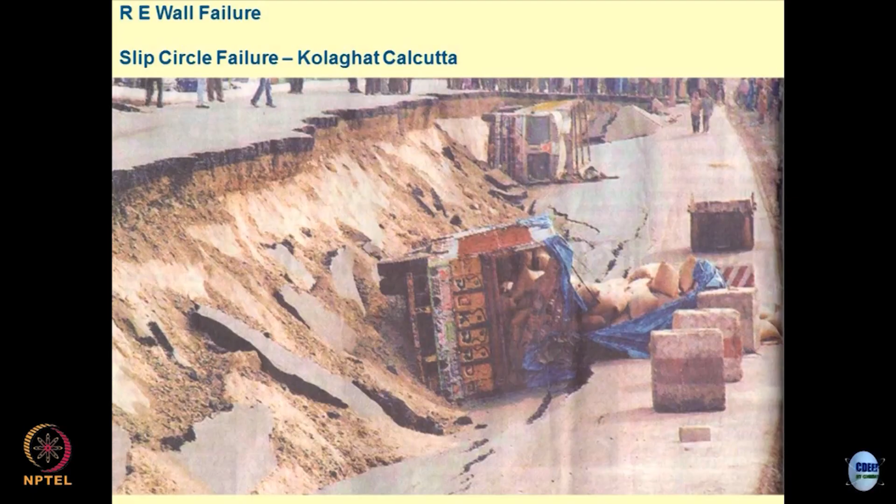The soil which you filled up inside is getting washed out, from the foundation itself. This is at the time of construction of the highway. Anyway, the essence of the story is that half of the road has collapsed, and these are real life photographs. Poor fill material, or maybe lack of compaction, or whatever. Look at how the whole system has cracked, the foundation failure. Another view of the same, showing how the entire road pavement has collapsed, the foundation soil has yielded, and hence this tragedy has occurred.

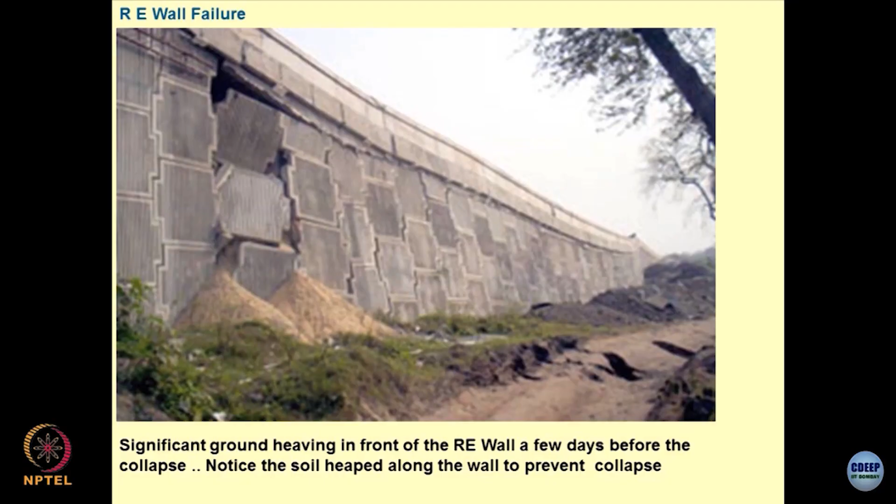If you see from the other side of the RE wall, you will see how the collapse has occurred. The filled material has come out of the wall, panels have dismantled, and the wall is defunct. Remember, each of these projects costs at least 40-50 crores, and once these type of things happen, there is no retrofitting, you can't retrofit anything, you can't make them overnight. So it is a loss of time, a loss of property, a loss of time and money, and what not, inconvenience to people, because when this was being constructed, people were facing problems, and now that it is defunct, people are facing problems again. I can't dismantle it and throw it away anywhere. So these are the issues which have to be borne in mind.

Most of the Middle East, Gulf countries, Oman and all these places, the big problem is: you want to develop infrastructure, fine, but there is a beautiful sandstone limestone formation adjacent to sea water that interacts with these formations. Very humid climate, extremely high temperatures, and sea water has lot of salinity, chloride content, sulfates. What do they do? They start eating up these formations. So this is one of the examples of chemical processes which are destabilizing the soil mass.

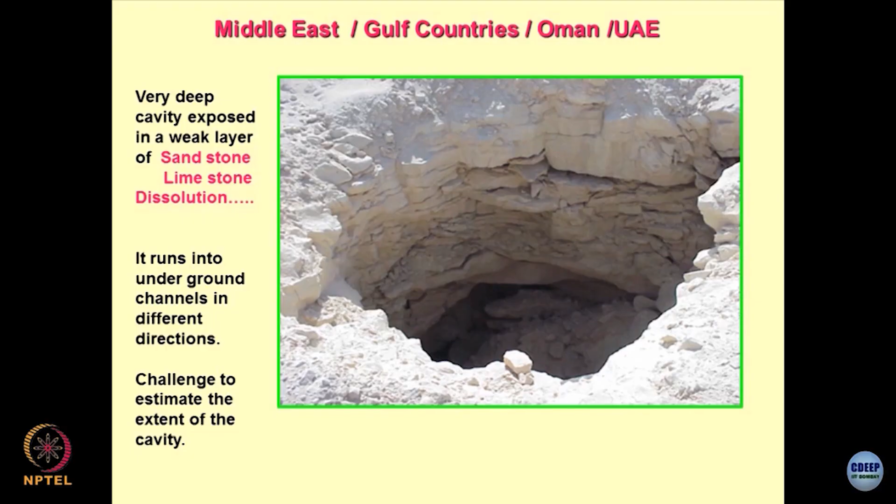Go to a place called Pisa in Italy and get a feel of why I am asking you to go there. It is a 4-degree lean. By the time you go and sit on the top of the terrace, you literally realize that your CG is getting affected psychologically. It has been retrofitted, are you aware? But it has been left as 4-degree. Why? Because if you correct the settlements, then nobody will come over here. And this is a big tourist place, I am sure most of you are aware of. The wonder of wonders is that the building is intact, no cracks, nothing, and it stands there. Whenever you get time, please go there, and you will learn a lot of things related to this.

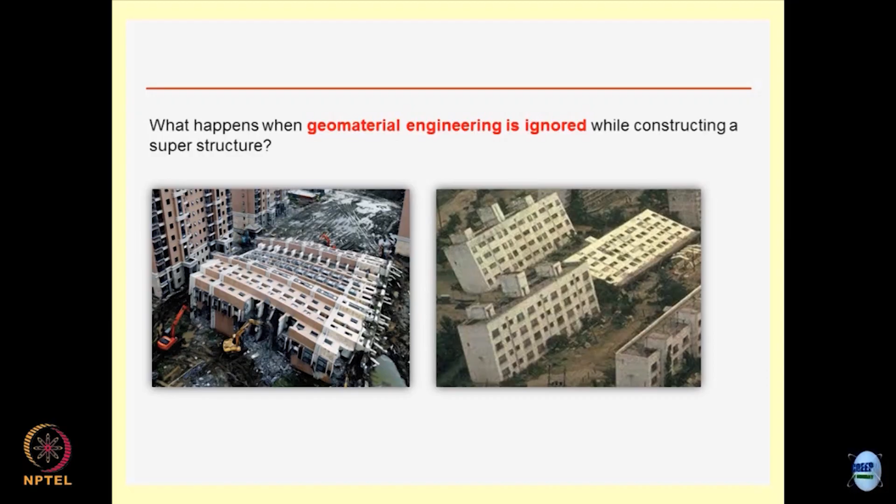This is what happens when geomaterials are ignored. These are the slides made by Lijit. So this is what happens, the entire building has toppled. Fortunately this has not happened - this is in Japan, a recent one. He is also from Kerala, by the way. So he has contributed this slide, and it works.

So anyway, coming back to the point, when you are doing infrastructure development in problematic soils, challenging soils, getting a solution is very difficult, and this is what I will try to address when discussing this course with you. What are the major issues, just to sum them up quickly, particularly to avoid failures - we have to learn from failures. We will be talking about soil investigations in this course for infrastructure development projects, roads, road widening projects, ports, powerhouses, fertilizer plants, specialized facilities and so on, establishing the subsurface profile so that we know where the hard strata is and we can lay the foundations.

You are not doing foundation engineering course, that will be in the 4th year. So once you have the basics of soil mechanics, geotechnical engineering, you can use them in creating the best possible foundation system. Anomalies are very important. So when we are trying to establish subsurface profile, anomaly - I showed you one anomaly, like big cavities getting formed because of dissolution.